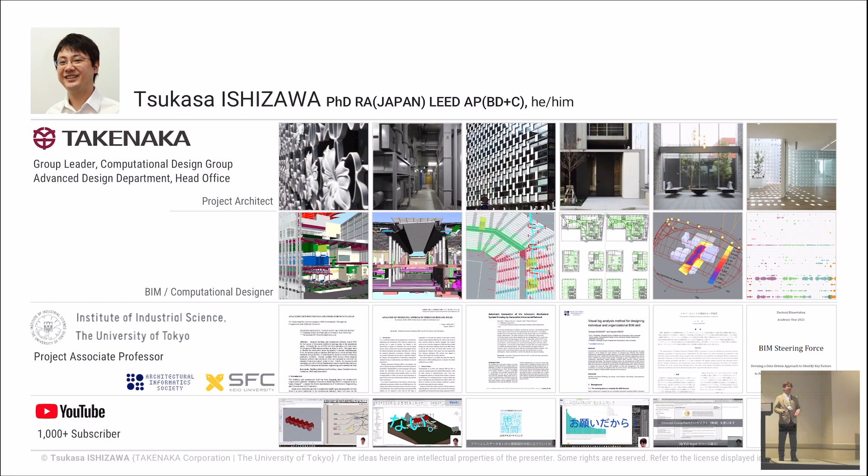So, about Takenaka. Takenaka Corporation is one of the top 5 general contractors in Japan. On top of its corporate scale, it's characterized by its history, whose origin can date back to the year 1610. After that, the company transformed into the modern corporate style. And since then, we've been engaged with a number of landmark projects like Tokyo Tower, Tokyo Dome, and some cultural facilities and mixed complexes.

So basically, we do everything around buildings, including civil work, so we are fully engaged with building projects.

Actually, we are a design-build contractor. In fact, 70% of Takenaka's projects are design and build. Simply, it means that in our Takenaka projects, our design team starts working usually from the pre-design phase, and we run the rough cost estimation at the end of the BD phase, and this is when our construction team embarks and starts talking about the design also. So sometimes they come to me and advise that, hey, maybe you will need more clearance from the neighbor building because we need to do scaffolding. So it's not really competing - it gives us good constraints for design thinking. And once it goes harmoniously, we can deliver the project on time within budget.

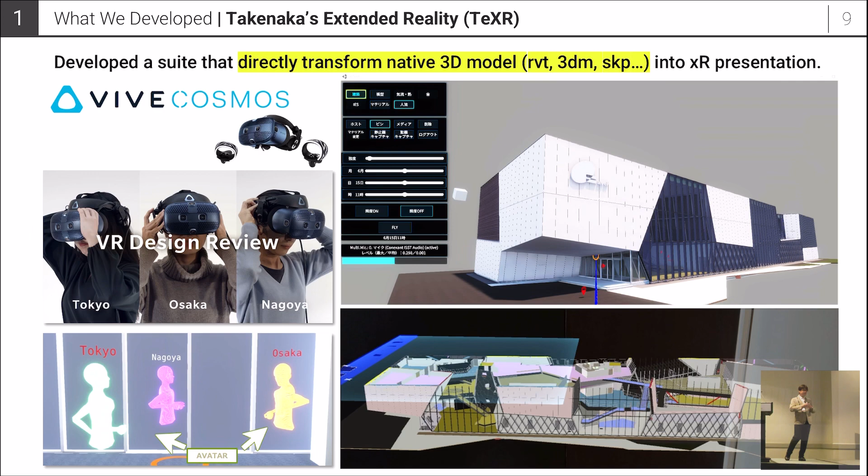One more thing - we can visualize what is basically invisible. In this example, we are visualizing the airflow as arrows or bubbles, or we simulate direct sunlight intake. Sometimes we can do very simple acoustic reflection simulation, and those are so essential for environmental performance and building sustainability.

These are so helpful to align the understanding of the stakeholders for decision making.

Let's go into the examples. The first one is about the San'ei headquarters office. The building overall shape looks boxy, but actually the internal view is a little bit complex.

This is because this office is for a steel fabricator located just next to the steel shop, so they wanted to have this office as a technology showcase. We designed the building with slanted walls and Voronoi-like volumes, which was quite difficult to understand in conventional forms. So we had the CEO, and we gave a head-mounted display to him, and he tried to manipulate the design to understand what's going to be built.

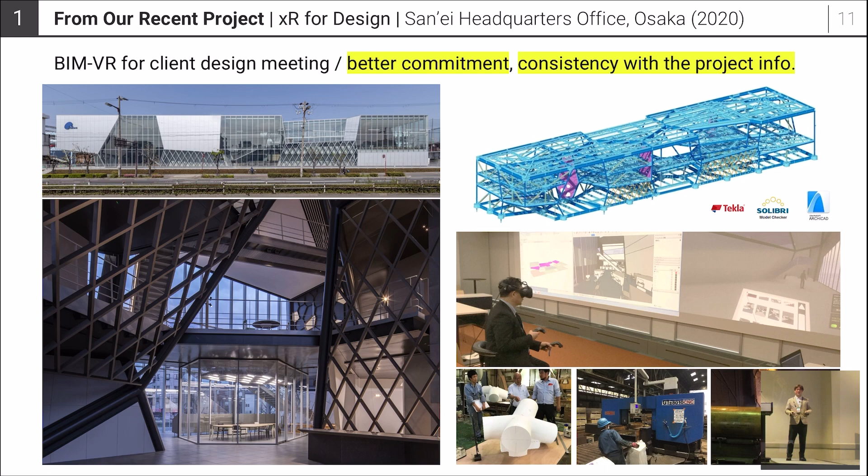Another project is about Chuo University. This building was characterized by a huge atrium space at the center. Now you see the rooftop design changed - and actually, the design of the rooftop and material selection has a great impact on building sustainability.

So we prepared several design options, and we ran this environmental simulation in advance. We took those design options and simulation results into the VR environment for the client to choose specific design options and see the impact on thermal comfort.

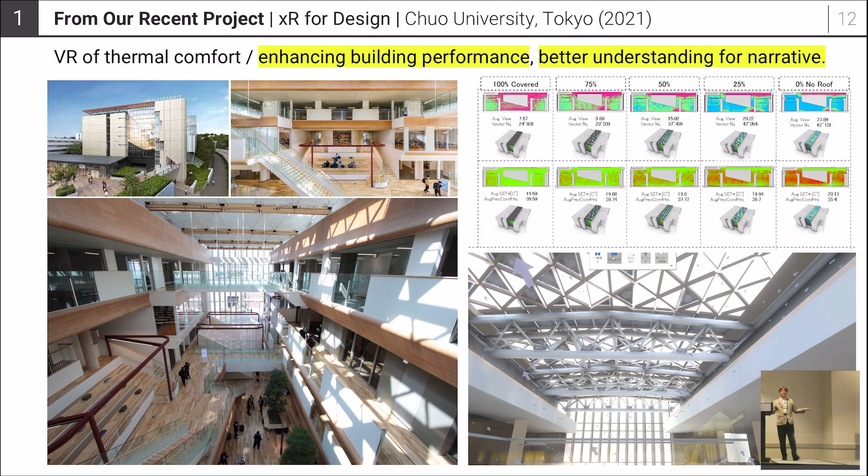In the video, you will see flying arrows - this shows the airflow with the temperature. Once they change the design, it will be reflected back in the arrows, and they will see the differences. They don't actually feel it, but it's visualized for the thermal comfort.

This is an AR project, a use case for inspection. This building is called EQ House for Mercedes, and they wanted a finely detailed building - this was possible because of the well-made design model.

We took this model for the AR inspection. Because the building has a quite complicated shape, we wanted to simplify things for the auditor to focus on. You can see at the bottom right picture that this is highlighting the sprinkler heads with dimensions, so that once people wear a head-mounted display, they can focus on the items they need to inspect.

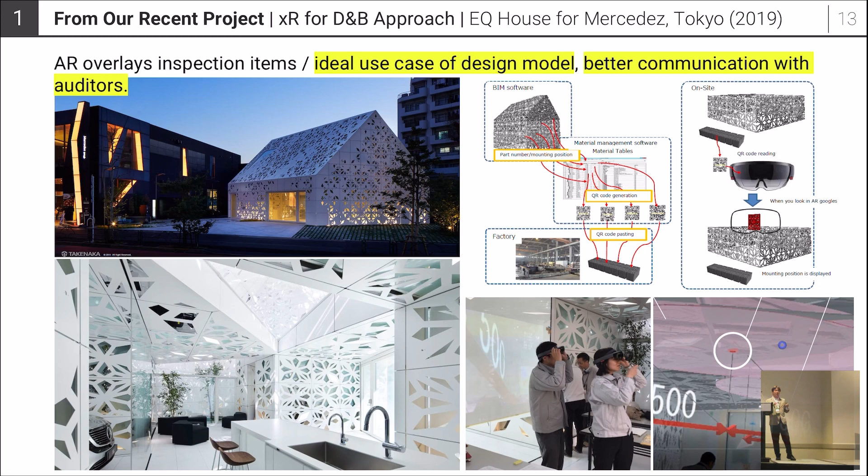One more thing, this is the POC project for the device called Atom by XYZ Reality. This is an AR device integrated with a smart safety helmet. It allows on-site AR, it's durable, and provides a hands-free environment for the site person to see the items to be built.

For example, on top you see the MEP services, and in the middle you see the drywall installation. In terms of accuracy, there's a comparison at the bottom, and it's quite satisfactory. The only issue is affordability—at the moment we can't afford this device for every site person.

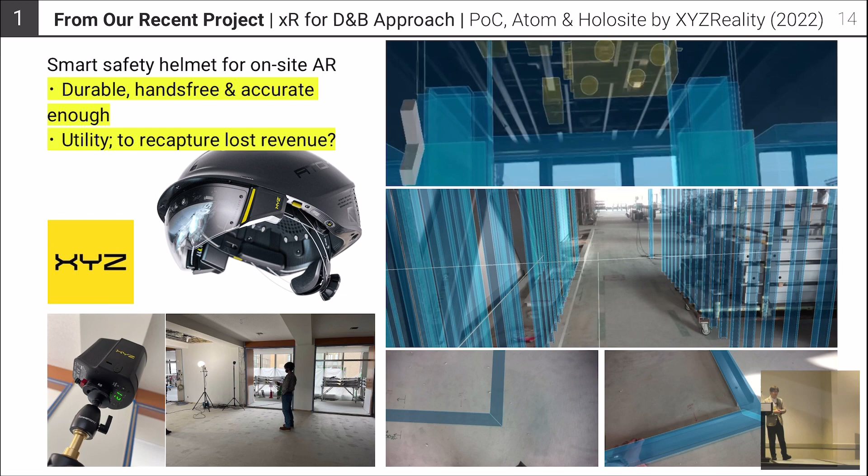But if it gains popularity, then we can step forward to paperless construction. So it's advancing, but I have some complaints about the use of the models.

They prepare the projector or monitor, show up the model, manipulate it for 3 to 5 minutes, then come back to the paper agenda and paper drawing and keep talking. Nothing wrong with this conventional working style, but it obviously looked like something additional or a top-up to the existing workflow.

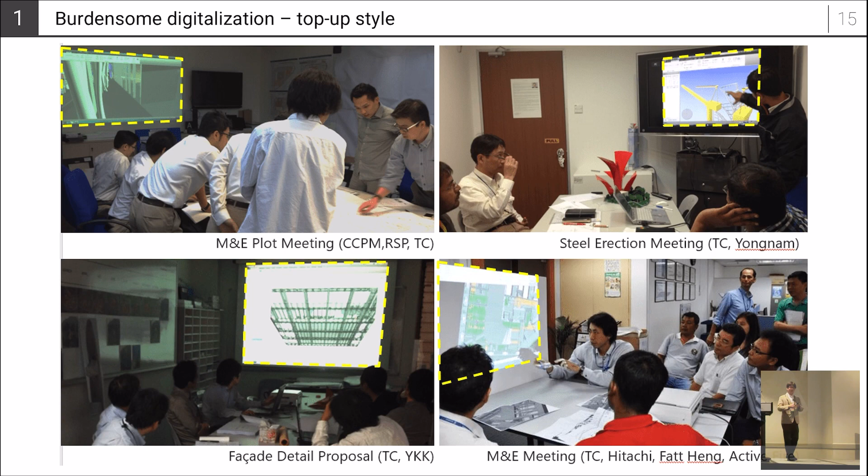So one day I started thinking like this. In the last 10 years, or even the last 3 to 4 years, we've become so familiarized with having meetings online, like Zoom or Microsoft Teams, whatever you name it. But still today, we prefer to have meetings face-to-face inside a physical meeting room, which is completely fine. But those spaces, whether virtual or real, have nothing to do with the spaces we are going to create.

Of course, it's not built yet. But how about virtually? It's somewhat there already because you've somewhat designed something. Then why don't we host the meeting inside the project model and have the project activity all the time inside the project environment?

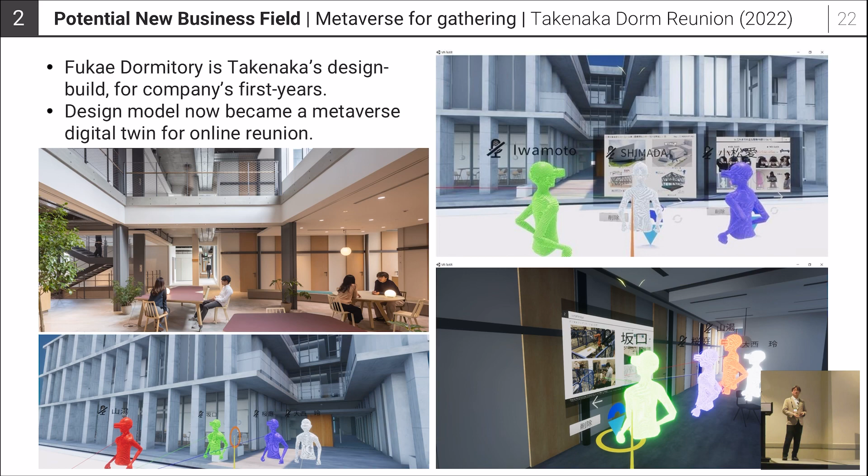So we took it to the AR environment and we invited the company people to exchange their latest changes. This was quite actively done because, due to the pandemic, people's behavior was quite restricted. But we realized that making conversation inside spaces related to some building environment is quite valuable. So we extended a little bit.

So this is something different. Recently we expanded our office a little bit, but this was not a design build, this is actually a retrofit. So we didn't have the detailed design model, but instead what we did is we took the 360 video device called Ricoh Theta, and we walked around the building and took it to the simple metaverse platform called Buralit. We called people and they joined this virtual tour. So still, this is a tour along this pre-recorded video, but they can spot and focus on the specific point they want to see because it's 360 video.

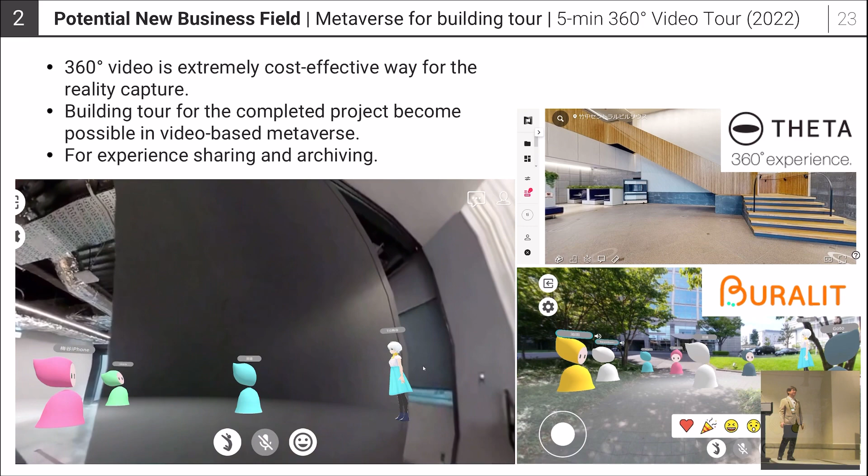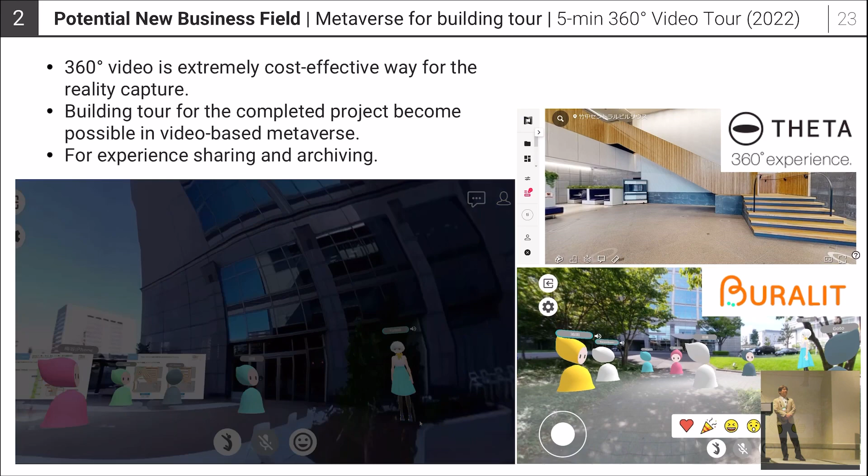And we can communicate over voice chat and text chat, or even with stickers, just like social networking tools. So this activates the conversation about the built environment. So why don't we all the time take this 360 video tool and share the building experiences with our teammates? Then it will activate discussion about what should be built and what's good, what's bad for the designs. It's gonna be useful. And if it's useful for the internal people, it's gonna be true for the rest of us.

Then this is the project proposal for a property called Chochikukyo. This Chochikukyo was originally designed in 1928 by an ex-Takenaka architect, and this is a housing property. Recently, Takenaka obtained this facility, and now it's designated as a national important cultural property. Because this property is located in a very quiet residential area near Kyoto City, it's so challenging to host a big group of visitors to be inside here physically.

But digitally, it's gonna be possible. So we just scan around the building and open up the space for a virtual building tour, then it's gonna be meaningful for those who are interested. We can even assign one building specialist to do the building tour and answer the Q&As. And if it makes sense, and we can find a way to monetize this tiny business, then we can think about a better management for this cultural heritage.

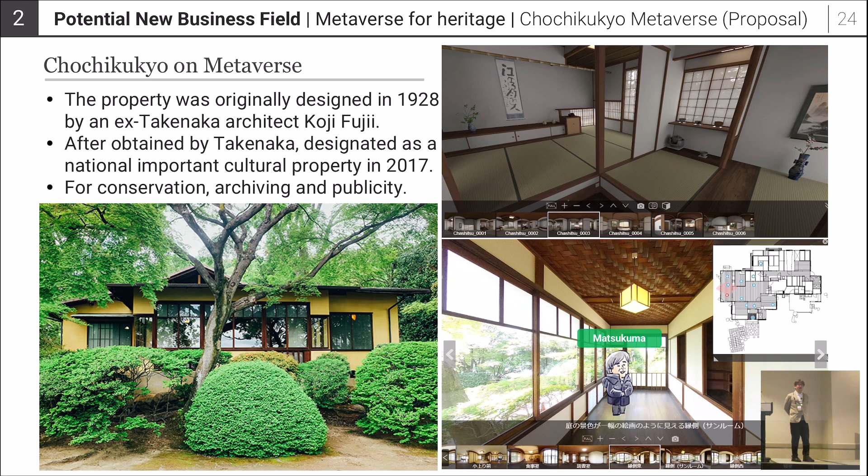This is the last example, and this is a tiny one. You can see a girl inside, and this is my 4-year-old daughter. She loves arts and crafts, and she always creates something new and brings it to me. At first I did some pinups so happily, but the space is limited anyway. So I took it to a box, but nothing happens after all.

So I imagined, what if I can do a quick scan of the drawing or works, and store it in a digital environment, and design a tiny virtual museum, and locate her works inside? Then I can do anything. I can open up the rooftop, I can enlarge a picture, and I can invite a group of people, and even I can invite a TV crew like this.

This costs very little, but this is actually expandable. So this is not only for the children, but maybe for everybody who loves the art. And if this makes sense, Takenaka will be so happy to design the digital native museum space. Actually, I talked about this idea to a friend of mine. He said, oh, interesting, but nothing happened after all. So if you find it interesting, please talk to me. I will take it so serious. Just joking.

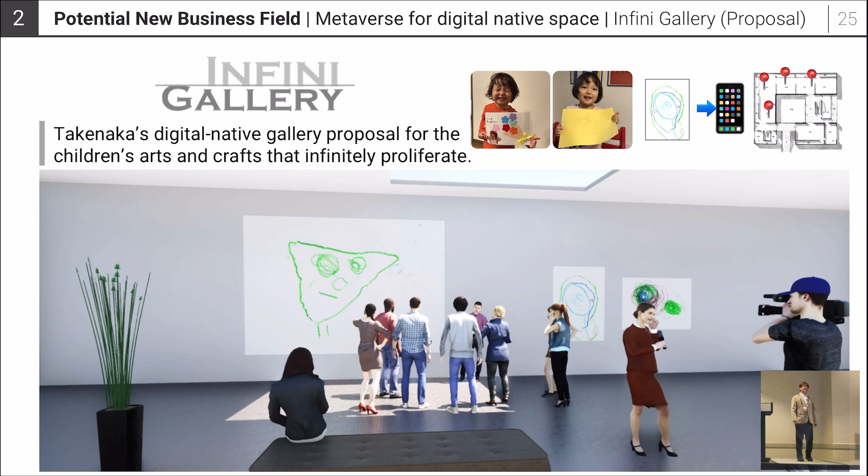So we've seen 4 different metaverse examples. The first 2 were under the concept called metaverse as a tool, where we were focusing on the communication happening inside the metaverse—it was just a digital venue to host those communications. Whereas in the last 2 examples, it will be aligned to metaverse as a target, something that people may want to visit because there might be something that only there you can see. So this is a quite useful framework to think about our purpose in looking at the metaverse possibility.

One more thing, it reminds me of this famous cartoon where the client asks you to create a swing, and somehow your engineer designs something on the left-hand side, but actually overall what you needed is just like on the right. So we, as building specialists, tend to think the model deliverables should always be like something on the left—so detailed, nicely coordinated. And this is a building actually. But for the layperson, for example, to my mother, how she recognizes the building is: here's a door, here's a window, here's a wall, that's it. And nothing wrong with that. In most cases, this is good enough.

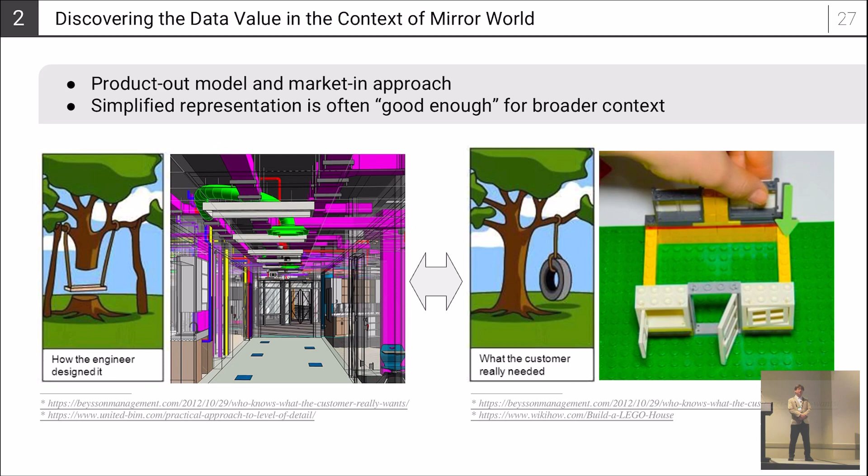But I know that there are doubts and risks. Some companies answer that investing in the metaverse is risky because the trend will fade, or there will be issues around cybersecurity, and the digital life takes over real life.

And in the world around you, there are tons of issues to be solved, and some people may question whether that's really the thing to be prioritized in real life. But I might say that maybe it is. VR, AR, and metaverse help save the architecture and construction world—it's used to preserve building conditions, or it's used for education, training, or knowledge sharing, or it contributes to creating better city data, or it's used for the smart city where it serves for better citizens' life.